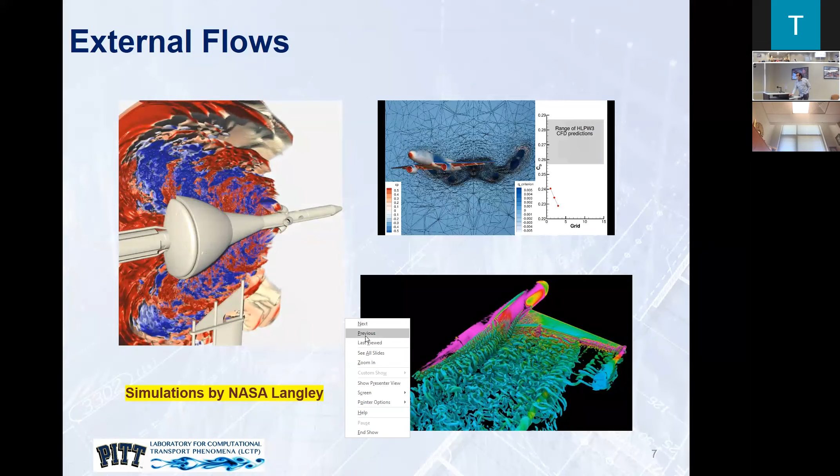Oops. Let's see if I can go back. This is right click and then go. Previous. Previous. Second. Yeah, just one. I have to. This is my. But I promise for the rest of it would not be as bad. Okay. One more.

But in my case, it just happened my last PhDs, the latest ones, just happened to go to data firms. They're getting 3 times as much salary as a professor or a research scientist. So a lot of the last set of my students are going to software companies and to data firms, the kind of things we do. They just seem to be more interested in doing computations, and if you're in data sciences and all that, it just happens to be going there.

Anyways, it's been a pleasure working with them, and I will be showing some of the work of these people. So you guys here at NC State...

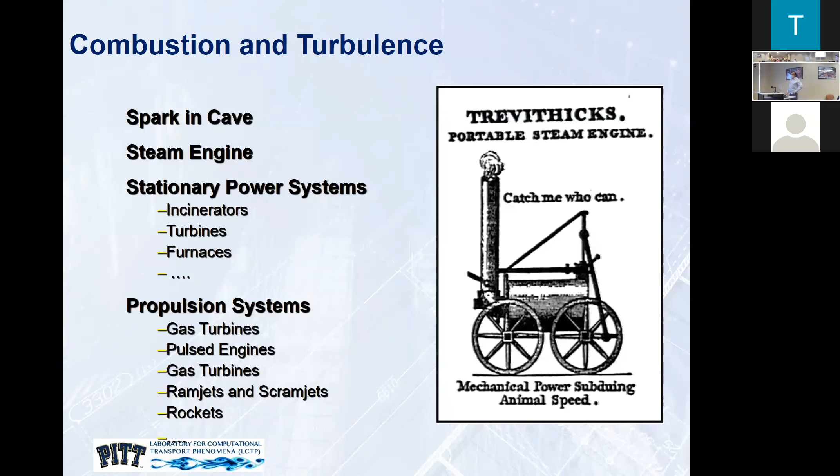I don't have to talk so much about it, but the importance of combustion and turbulence has been there since mankind has been there, a major part of aerodynamics and propulsion. And you have the world experts here in all of this field.

So as you know, if you're working in the field of aerodynamics and propulsion, the engine propulsion is one of the most important parts of the aircraft. That's the most important part of the aircraft to be concentrating on.

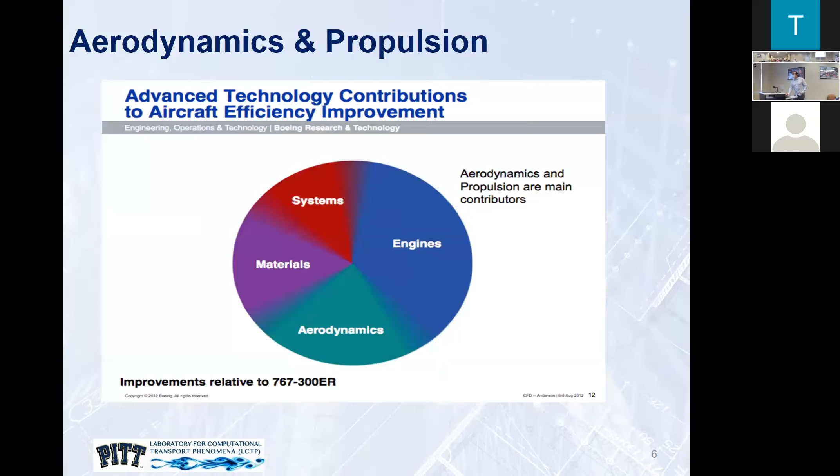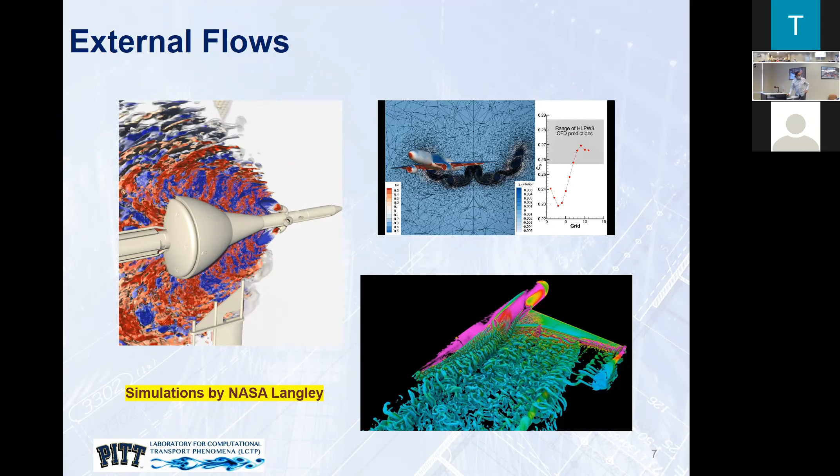And it goes for both external flows. Any of those your calculation? Because I stole them from NASA. So

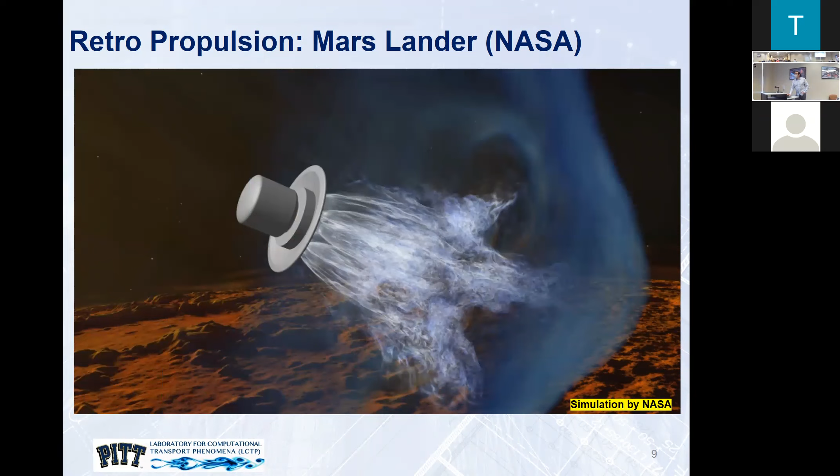And internal flows, that's where combustion is of primary importance, and also for the future, and all the other things that are outside of what we do on an everyday basis.

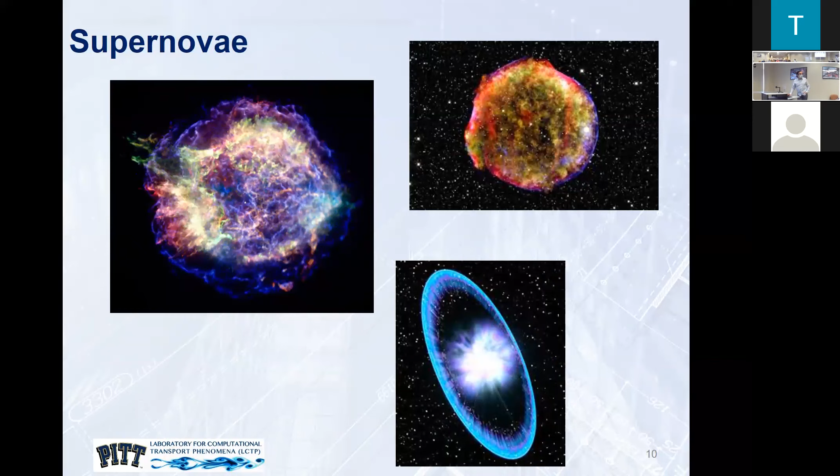If you want to do supernova, it just seems that DOE is very much interested in it. Combustion is a very important part of it, a major part of energy consumption, and even in the foreseeable future, combustion seems to be a major part of energy usage.

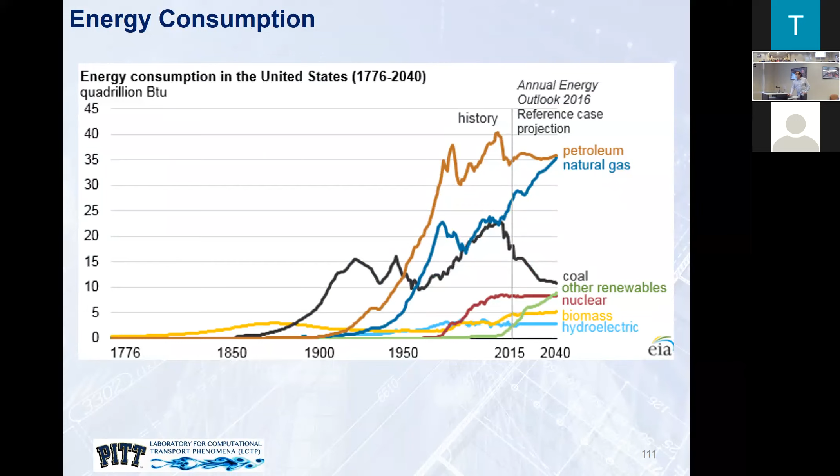Now this part you already know. But what has been happening within the past 5 to 10 years, there have been two major revolutions affecting the combustion field. One of them is the big data revolution, and the other one is the second quantum revolution.

Both of these revolutions have been major impact in other fields, and are starting to have some effect in the field of combustion as well. As you already know, the paradigm of science has always been theory and experimentation.

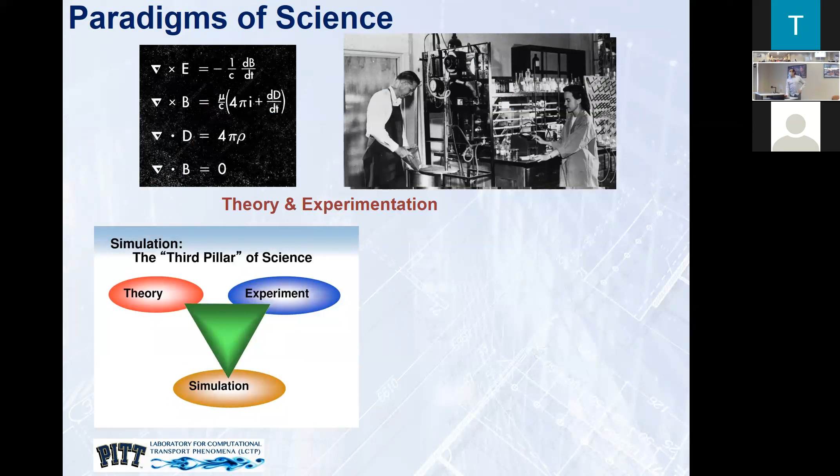Back in the 80s, people came up with the field of simulations, calling them the third pillar of science—in addition to theory and experimentation, you can simulate things with the use of computers.

And now the fourth paradigm is the emergence of data. If you have a model and you have data, that's why data sciences are becoming very important.

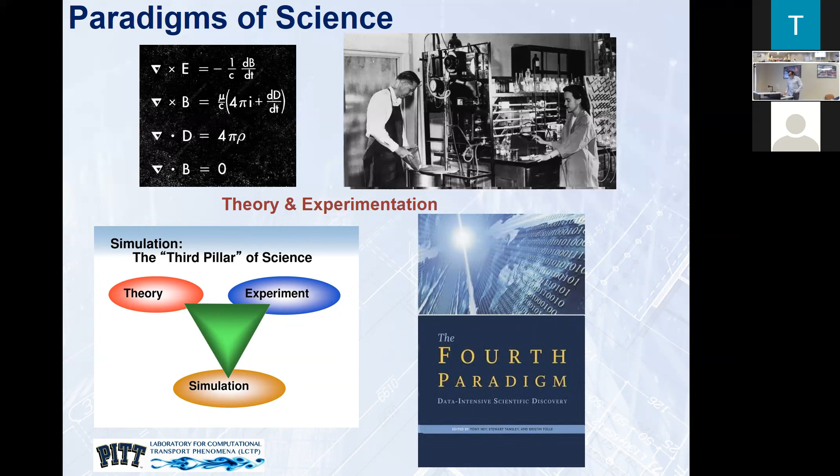So combustion scientists and turbulence people have been moving along with this. They've been going through the simulations, and one of the major advancements has been done by turbulence people, computational turbulence researchers who made major impact in the field of simulation. Now data is having similar effects.

Also with computing platforms, as you know, starting with card punches back in the 50s and 60s, and going on to parallel and massively parallel computations. But if you look at how computing has been going for the past many years, there's Moore's law, saying computers are supposed to upgrade every 18 months or so, doubling speed every 18 months.

Every year there's a competition over which school or country has bigger or better computers. What's happening is that as these chips get smaller and smaller, we've come to a point where the speedup in computation cannot keep up.

I've been doing turbulence computation for the past 40 years, so I've seen this incremental change of computers, doing faster and faster computation. But we're getting to the level where increasing the Reynolds number with the supercomputer isn't gaining much anymore.

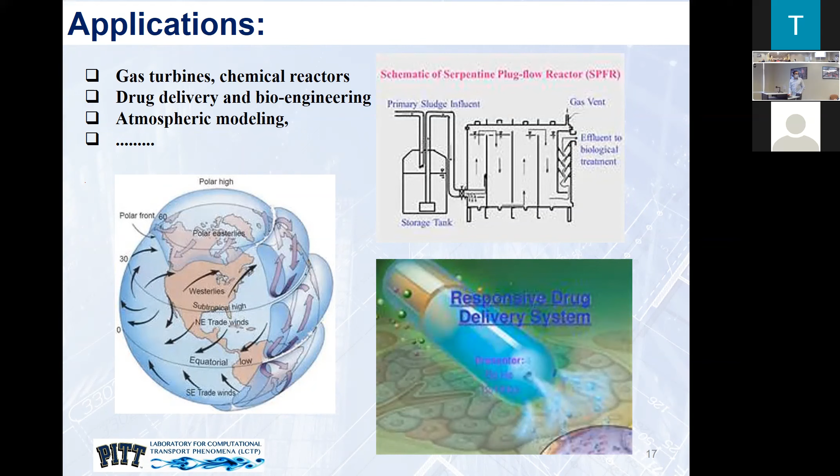This problem, binary mixing and reaction, has a lot of applications, as you already know, and many of you are doing this kind of calculation.

So there are two things that we do. If you're a graduate student in this department, you know what they are. We approach the problem of turbulence and combustion in two ways. One of them is the brute force direct numerical simulations. We simulate the heck out of everything. So we are limited by the Reynolds number and Damköhler number and all that.

On the other hand, we also do a lot of modeling of these flow problems, something that is known as the Reynolds-averaged Navier-Stokes and large eddy simulations. And we use stochastic models. We have very sophisticated stochastic models for modeling of those. You guys have had Dr. Hassan, who was one of the premier people in the field of RANS modeling.

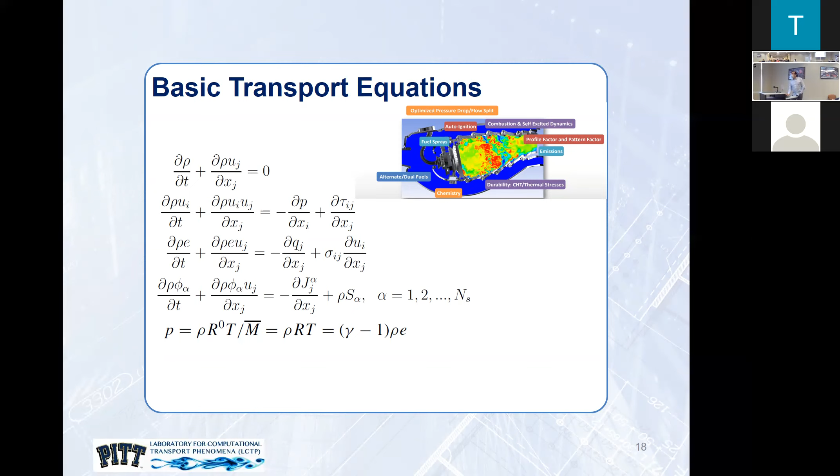He does Reynolds-averaged RANS modeling, Reynolds-averaged Navier-Stokes. We do something called the probability density function approach. It's something I have been doing for the past 30 plus years, and we have developed it for the context of LES. So we have a basic set of equations for chemically reacting systems, whatever way you want to write them.

And what we would do with these equations, we either filter them or we average them. By filtering, meaning that you want to look at the smoother field, so it is not as expensive. With LES, you pass it through a filter and make it smoother, and that filter is given by the filter function G. And this filter has to have some mathematical properties, so you can do things correctly.

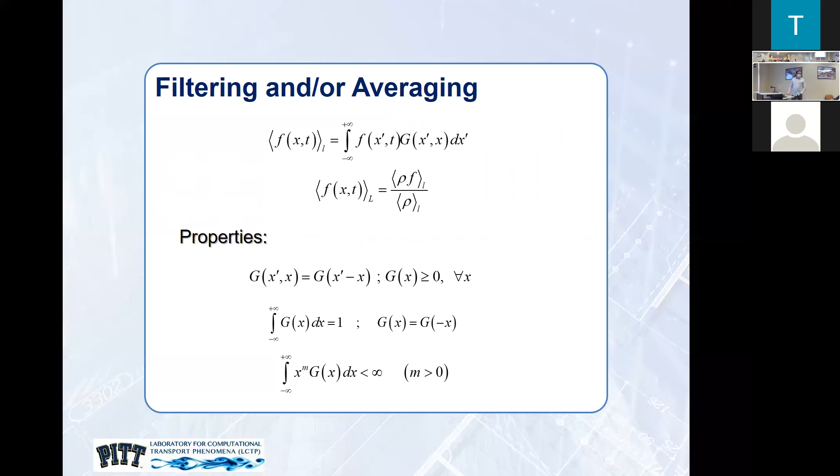So if you write the equations for the filtered quantities that are given by these brackets, either by subscript l or capital L, whether one of them is density weighted or not, you can write the transport equations for them. And if you write the equations for these averaged quantities, like anything else, you would find a whole bunch of terms that you need to model. If you take a course in turbulence, there's a whole bunch of these correlations for the energy equation, for the momentum equation, for the scalar, and S, the source term for the chemical reaction. Those are the terms that you need to model in order to close the set of equations.

And this is what you already all know. Okay. And for those second order moments, either subgrid or Reynolds averaged, if you write the transport equations for them, they have higher order terms that you still need to model. This is a problem turbulence modelers have been dealing with for a century. Since the time of Osborne Reynolds, people have been dealing with this problem.

Let's see. Okay, so the approach that we had adopted, and now we see the relationship with everything else we are doing with machine learning and quantum computing. We look at something called either the filtered density function, if it is used in the context of LES, or the probability density function, as it is known in the context of Reynolds-averaged Navier-Stokes. We look at the PDF, all of the statistical behavior of all the variables.

So for example, if you have chemically reacting flow at low and high speeds, your transport variables are all the velocities, pressure and the energy, and all of the species. So in here you have the velocity u, the phi, that is the scalars, and the density, pressure and the energy, and P is the PDF of them within the subgrid. And you can write an exact transport equation for that PDF, and that equation is written exactly like that.

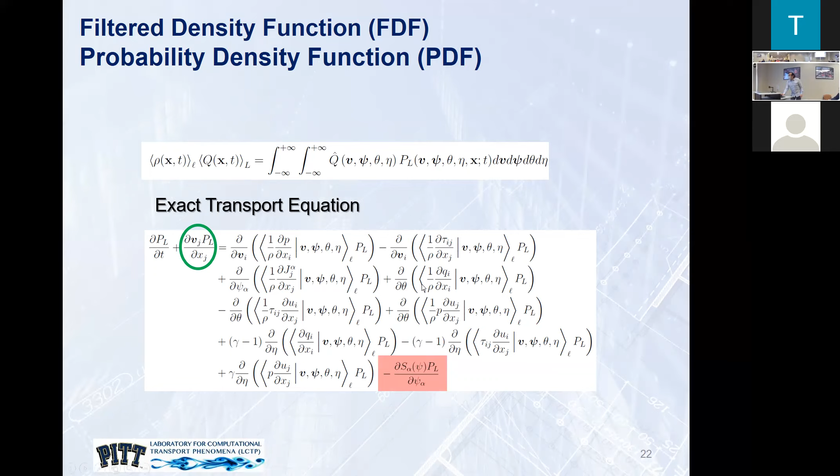The bad thing is all the other terms that you see in there, the conditional averages, you need to model. You need to model those terms. And for a long time, modeling of these terms has been one of the major problems for people who have used them.

We borrow from the field of stochastics. You write the stochastic differential equations to capture the physics to the best that you can. This is a model, and a model is never exact. So what we do, we look at all the statistical quantities, like velocities, concentrations, energy, and pressure, and we write a stochastic equation. Those are model vectors.

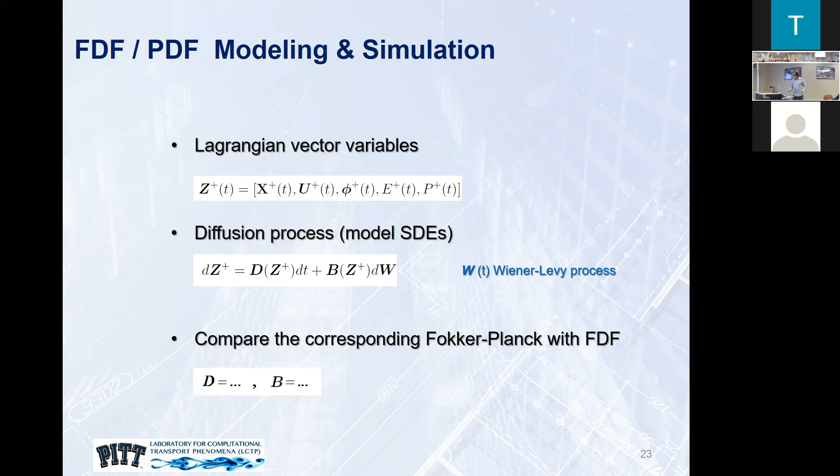And so that equation dz, the dt term is like an ODE, and then the W is the Wiener-Levy process, so it makes it a stochastic differential equation. And associated with that stochastic differential equation, we have a Fokker-Planck equation that basically tells you what your model PDF is. So that's the way we model this. And how we model them, there is a whole art to it.

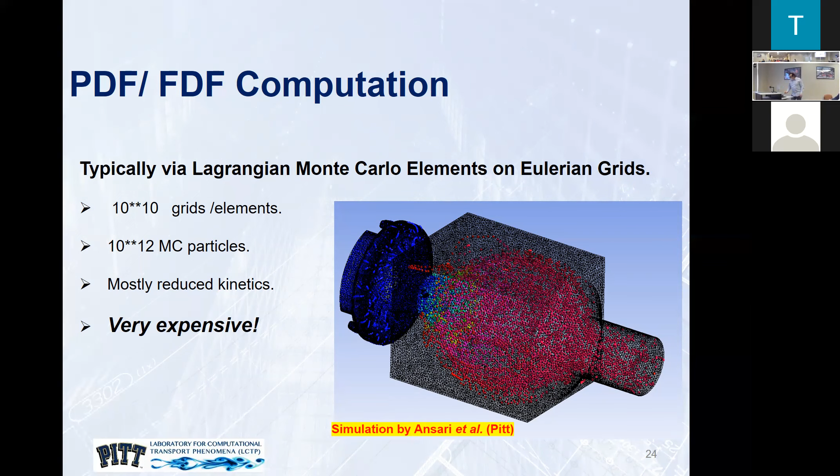So the idea is, how we can improve on this modeling, and how can we transport them on quantum computers, even though quantum computers do not exist yet. So the first part, which I'm going to talk about, is that we said, okay, let's do the modeling of this thing, but not for a big combustor. Let's see how we can use machine learning techniques. There's been a lot of talk about machine learning, but we said, how can we use machine learning techniques and augment them with the physical modeling?

In order to understand some of the terms inside this PDF or FDF closure that need to be modeled, we looked at a simple homogeneous mixing in which we have two reactants coming inside this reactor, and it is considered homogeneous turbulence. It goes along the reactor, and you get the product coming from the other end. And that is the exact equation for the PDF, in which we have that term, the conditional expected dissipation. That second term on the left-hand side needs to be modeled.

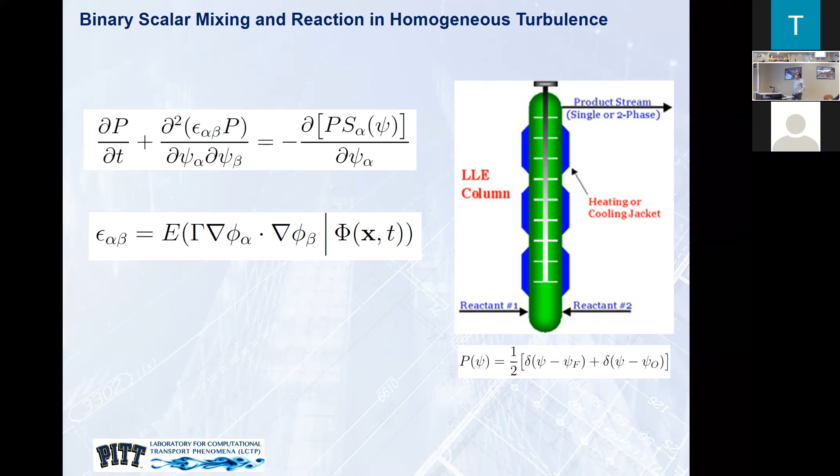So we said that if we do the calculations on it, this is the DNS, people do it all the time, we can get that conditional expected dissipation out of it. So it can come either from the DNS or from experiment, right? But for people who do these experiments, calculating the conditional expected dissipation is a very expensive thing. We said, okay, is there a way that we can use this model method in order to model that term? So we have been using physics-informed neural networks.

And I bet you guys, these days, anywhere you go, you see these neural networks everywhere, right? People see them all the time, and some people are even sick of it.

So what we have done with physics-informed networks is that we said, okay, if we get the PDF from experiment or from simulations, how we can use that data to backtrack, like reverse engineering, all the terms that need to go into it as a closure. And people who do DNS do this all the time. They want to capture closure from the simulation.

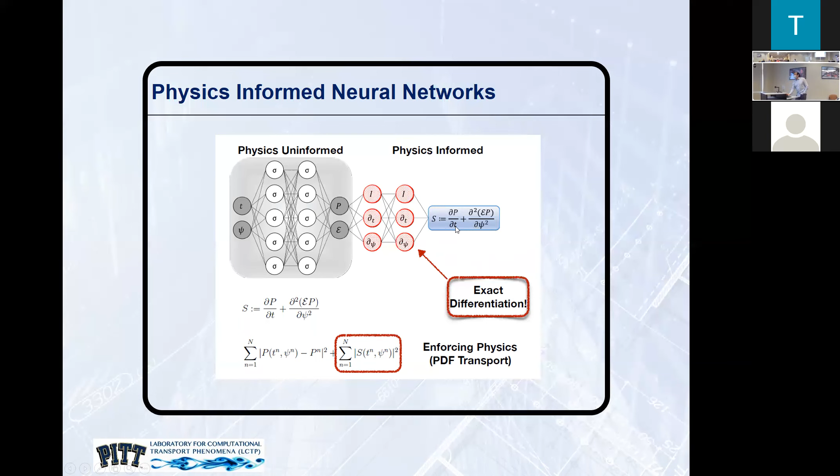So we said, okay, how does it work? The advantage we had is that if you have been working on this for a long time, you always have good cases that you can use for testing new models. Back in the 90s, one of the big names in turbulence modeling was Bob Kraichnan, who was the last postdoc that Albert Einstein had at Princeton. Bob Kraichnan came up with the amplitude mapping closure, which back then was supposed to be a revolutionary model of turbulent mixing.

So we did this with a very simple deep learning framework, about 10 hidden layers and about 50 neurons per layer. The PDF could come from anywhere, it could be experiment, but in this particular case we have an analytical solution. And what you get from the exact solution and machine learning with a very small number of neurons is incredible. The exact PDF that the machine learning technique sees, and the one that we learned, for both the PDF and the conditional dissipation, the agreement is very, very impressive.

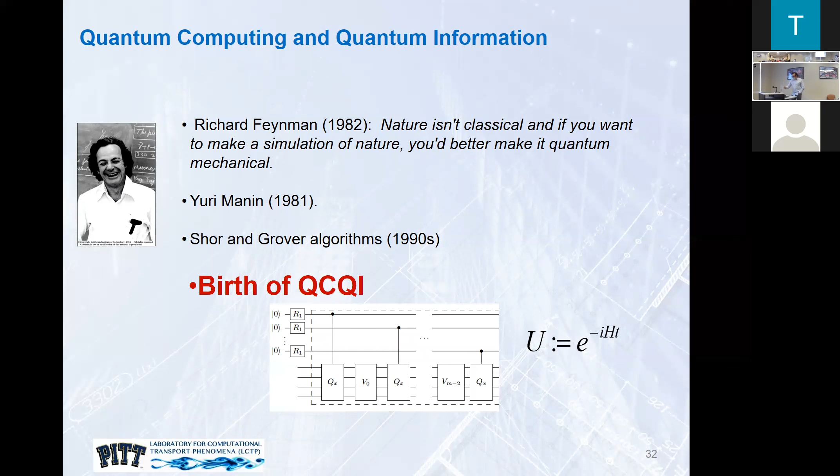So the first thing, the quantum algorithm by Shor, shows that if you want to factor large numbers, it is much, much faster on a quantum computer. So it has many, many applications. And the other one is the Grover algorithm for search. What you want to do with searches is much faster with quantum computation.

And this is what people have known since 1990. The idea is, okay, what can you do with it that can be useful for others? And that's where we came in. We're coming from the engineering side, and we say, okay, what can we do that can be useful from an engineering point of view? If you look at the difference between classical and quantum computing, on the classical side, you always have bits, zeros and ones. Either 1 or 0, right?

And in quantum computing, the concept of the qubit reminds me of myself. When I first came to this country as a foreign student, people asked me, would you like coffee or tea? I said yes. Foreign, coffee or tea, yes. So it is 1 or 0, yes, both at the same time. Both 1 and 0. That was the qubit.

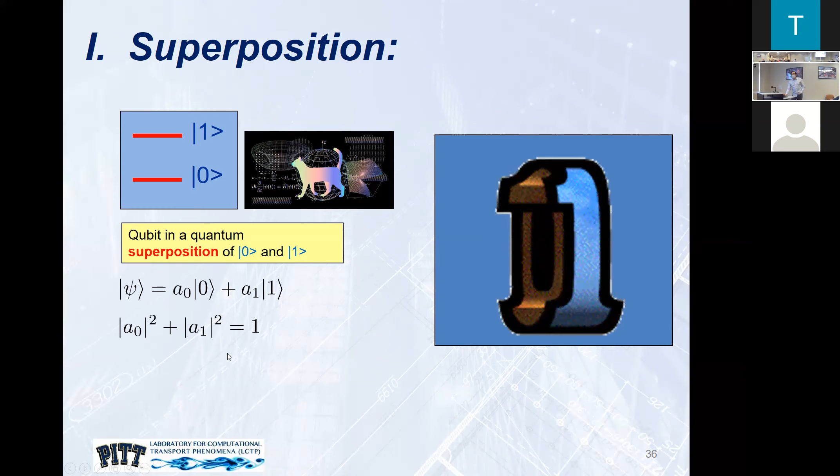So that's one. And how can it be 0 and 1 at the same time like this? This is 0 and 1 at the same time. But once you measure it, that becomes your reality, right? In fact, this would be the probability of being in state 0, the probability of being in state 1, and the summation is 1. But after you measure it, the probability of the one that you observe becomes 1. The basics of quantum.

And the second one is entanglement, okay? Entanglement is that if you have more than one qubit, the state can be described by 2 to the power of n complex numbers. So for example, with n qubits, any state could be represented with all 2 to the n of these. So with just 1,000 qubits, your state is represented by about 10 to the power of 300 coefficients.

And the physicists tell me that this is more than the number of atoms in the universe. I said, are you sure? I mean, that seems small. And they said, well, if you don't believe us, go count them. And this is the number of things that you can use.

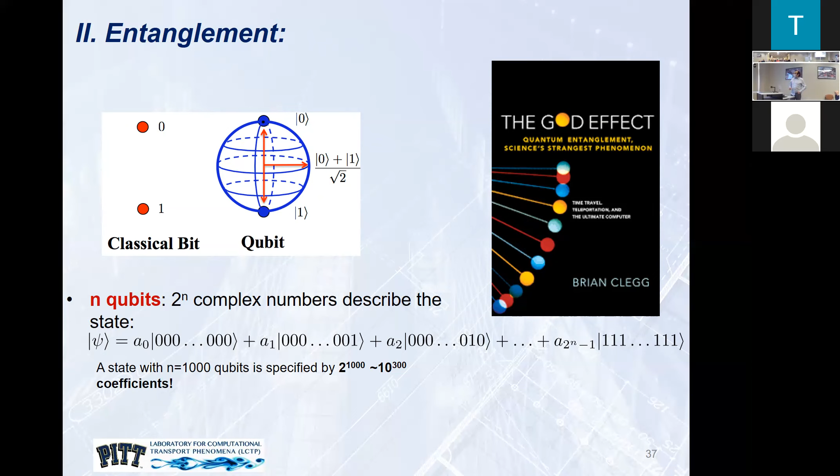And imagine if that is the storage of your computations. There is a whole bunch of books on it related to the supernatural and stuff like that. I try not to think like that because my connection with the afterlife is not so good, so I just look at them from an engineering standpoint.

So what is the difference between a classical and a quantum computer? The one on the left is just typical classical gates, zeros and ones, and you have all the NOTs and ANDs and XORs and all the other gates. The one on the right is a whole bunch of matrix operations. These are all quantum gates, and that's how the operation is done. So this is exactly what a quantum computer does: a quantum state coming in, a whole bunch of gate operations going on, and that's what the result would look like.

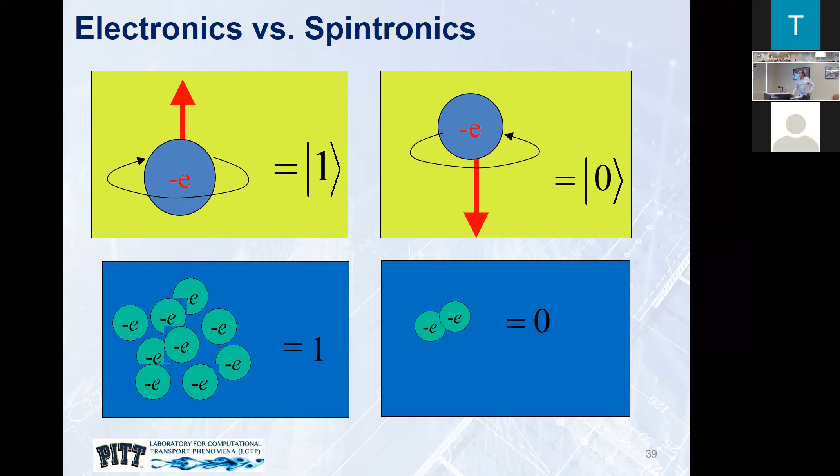And what you have seen in classical computers, you see electronics, zeros and ones. In quantum computing, the way they refer to them is spintronics, and you see a lot of this, an electron with a spin up and down that represents the vectors zero and one.

So how does the calculation go? In classical computing, you start from initial conditions and you do the calculations. At the end of the calculation, that's what the result is, exactly what it is. Even if you are doing a stochastic calculation, at the end, the results are deterministic. Even if you are doing Monte Carlo or stochastic, at the end, you have everything in hand, you print it, plot it, whatever you do, take selfies with it. The thing is right in your hand.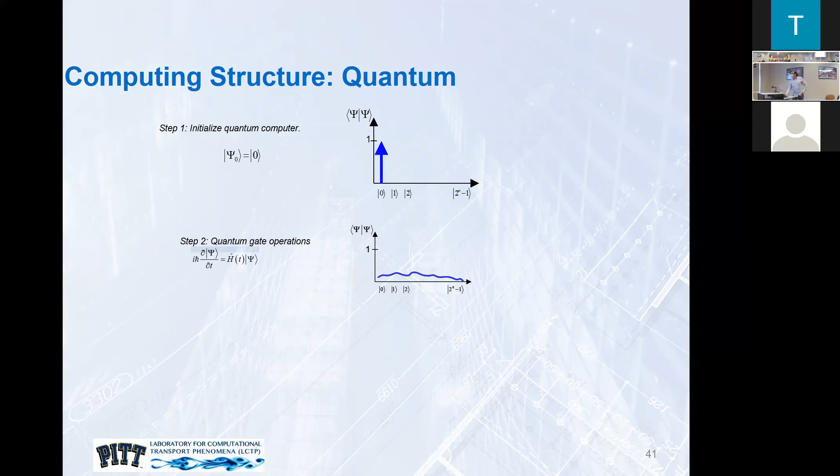Now, what is happening with quantum computing? You start from the initial case, then you have the initial state, and immediately, let's say, the gate operation is given by the Schrödinger equation. So immediately you get a stochastic PDF. All of the states are in it immediately. And so once you measure it at any point, that's exactly what your measurement is at that point.

That's what you're measuring. So the quantum algorithm is what gives that measurement with the most accuracy possible. That's all the beauty of the quantum algorithms. And they have to be written using entanglement to make the calculation more efficient than the classical one. That's the whole idea of quantum computation. I don't need to talk about this one.

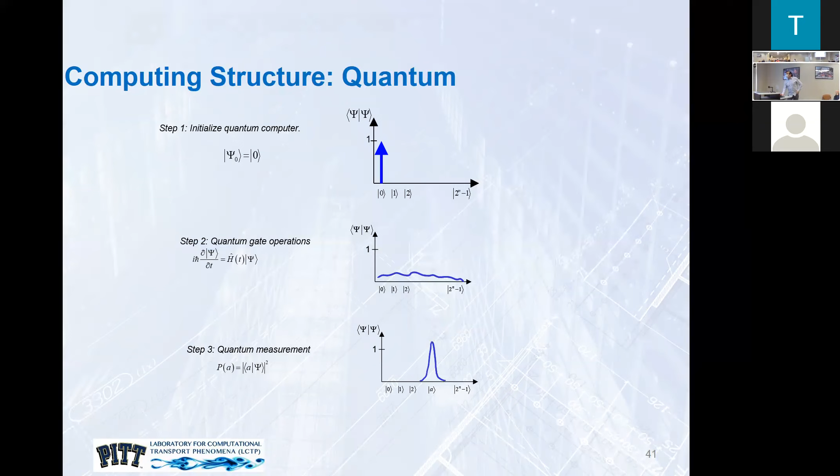So quantum algorithms, that's what we're interested in. There are people at IBM and Google talking about gate-based universal quantum computers, but they're not really operational, but the algorithms are there. And the speedup comes from this enormous Hilbert space because of superposition and entanglement. And there are algorithms being written, some of them even in mechanical engineering departments.

These algorithms are shown to be a lot more accurate. For example, search algorithms, solving linear algebraic equations, Monte Carlo sampling. These are for digital universal quantum computing. People have shown if these machines are there, they're going to be faster. These algorithms are faster than their classical counterparts.

So the way we made use of that for solving this problem: we solved the same mixing problem, but we modeled the mixing term, because we have to model it. We modeled it with the coalescence dispersion model and used Monte Carlo to solve it. And we solved it with Monte Carlo classically and with Monte Carlo by the quantum algorithm. Rolando Somma is a research scientist at Los Alamos. He's a quantum algorithm expert, and we worked with him in devising this algorithm.

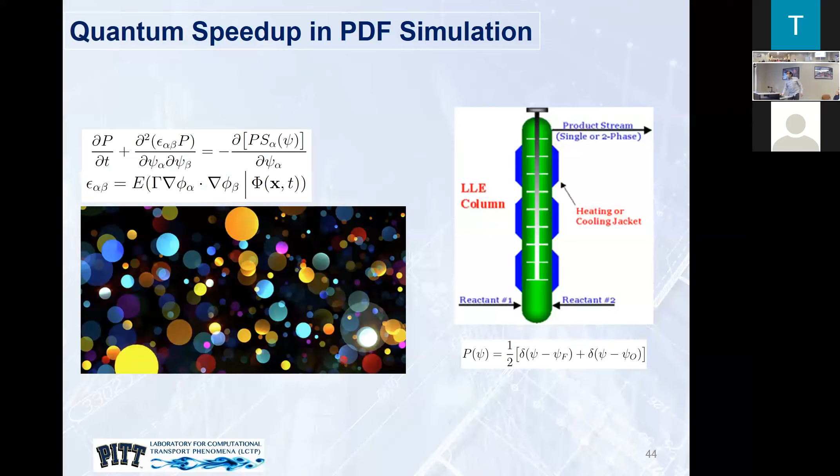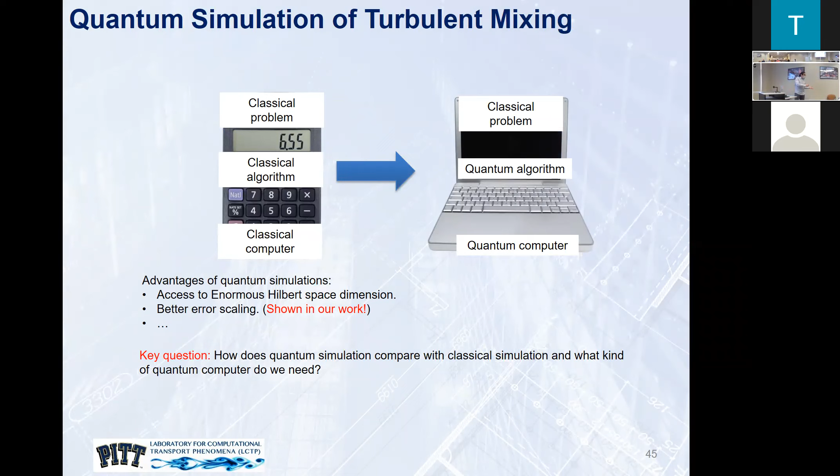And the way these calculations are being done: normally you have a classical problem, a classical algorithm, and a classical computer. But here we have a classical problem and the quantum algorithm, but we don't have a quantum computer. So we had to mimic this on a classical computer using the quantum algorithm, which is very inefficient. It's not an efficient way of doing it. But we wanted to demonstrate what happens if the machine was there.

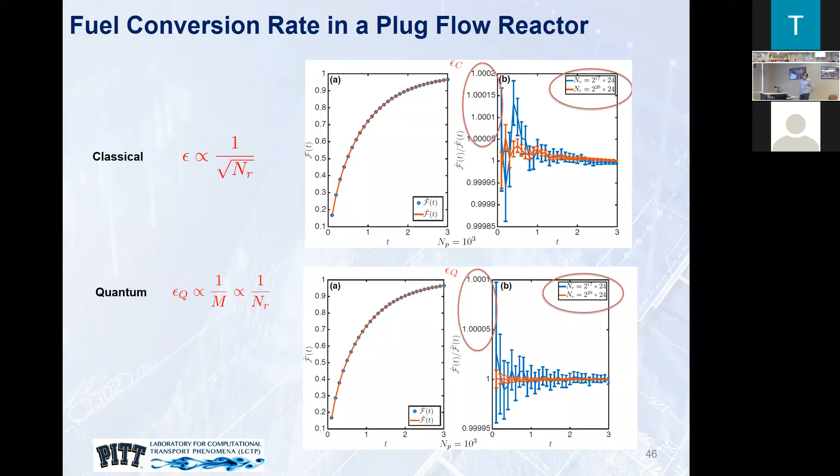So this is what we basically get. This is the fuel conversion rate in a plug flow reactor. The one on the top is classical computing. The error of classical computing goes as 1 over the square root of the number of realizations in a Monte Carlo routine. And the one on the bottom is the quantum, which scales as 1 over n. And these calculations are being done with a large number of particles.

So this is what we find to be a major breakthrough in this business, showing the error scaling if you are doing it classically or by quantum. The quantum, being the red one, gets a much, much faster rate for this kind of calculation. So if you're a combustion scientist, this is one of the examples in which quantum computation could be much more productive, much faster and economical.

But one example, we showed there are other examples that people are showing. There are some people using algorithms to solve turbulent pipe flow problems and others.

Now there's a problem with digital quantum computations. One of the major problems is that the qubits interact with whatever goes outside. That's the nature of quantum things—they cannot isolate this. There's a lot of noise within the system, and this is one of the major problems people are trying to deal with. With this quantum gate-based universal computer, any kind of fluctuation—temperature, electromagnetic, whatever—this fluctuation would introduce error, and then how to make error corrections.

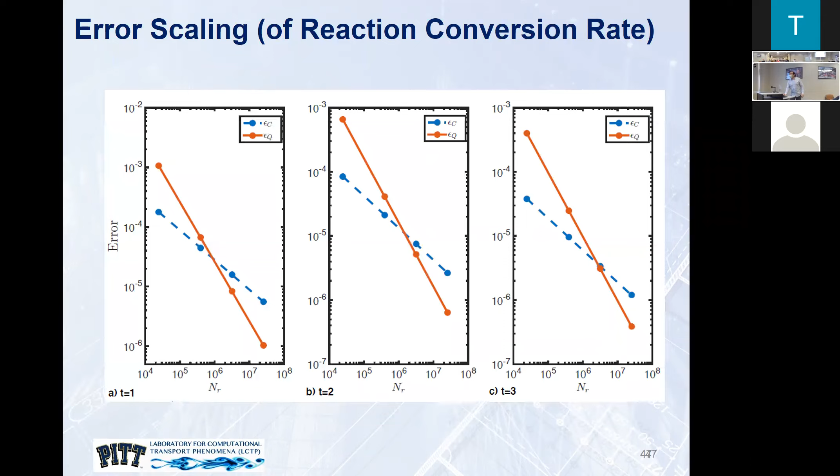So what are the options? What are the alternatives? I talked about some of them. One is the NISQ computer—people say okay, there might be some noise in it, but maybe the noise can be tolerated. That's one.

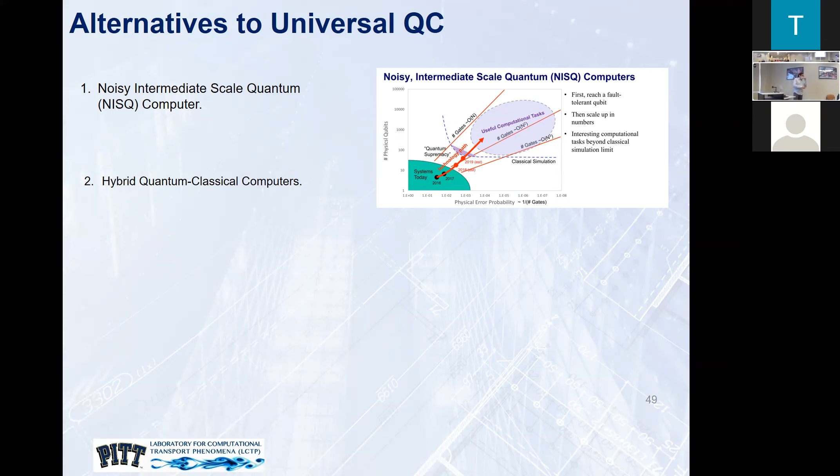There's another one, a hybrid quantum-classical computer. These are machines where we can do some part of it classically and some part in a quantum fashion. A lot of people in chemistry like that—they can do some calculations on the quantum side and then bring them back. That's one of the approaches.

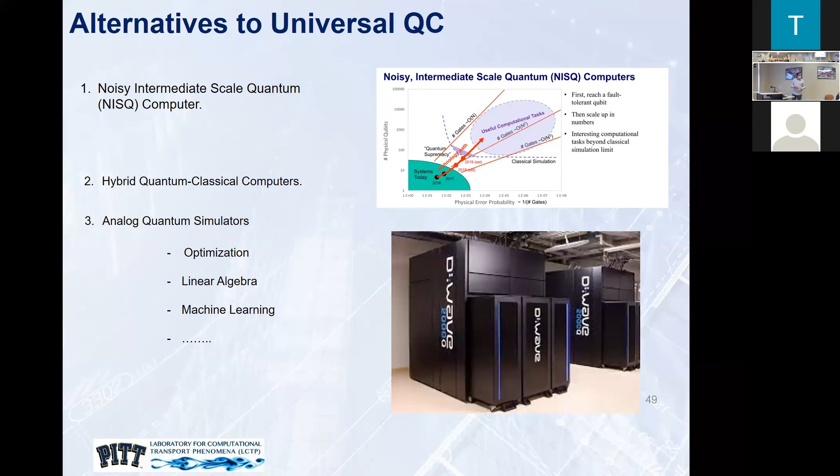And there's an analog quantum computer—you've probably heard of the D-Wave machine, the quantum simulators. What they do is just simulate a quantum system, a particular case where you know the Hamiltonian of it, and you simulate. So these are the approaches that are there. If you're interested, as I said in my review, I explain them and give references if you want to know more.

But the one that we like, and I really think is going to make a big impact, is quantum-inspired algorithms. These are algorithms that come from the field of quantum, but we apply them in the classical sense—the original idea comes from quantum. If we look at the Schrödinger equation, one of the things it has to do with is the many-body problem.

There are many bodies interacting with each other, and a lot of these interactions—if there's a lot of local interaction it might be important, but faraway interaction may not be that important. That's the way it is with turbulence: we have a lot of interactions closer together, edges closer to each other interact, while edges far apart would dissipate and may not have that much correlation. So we can see there's a big way that we can connect these two.

This is the idea in quantum physics known as tensor networking. Tensor networking is going to become a big thing. Our paper on this just appeared in Nature last month, Nature Computational Science, and I've been telling people this is going to be the new thing.

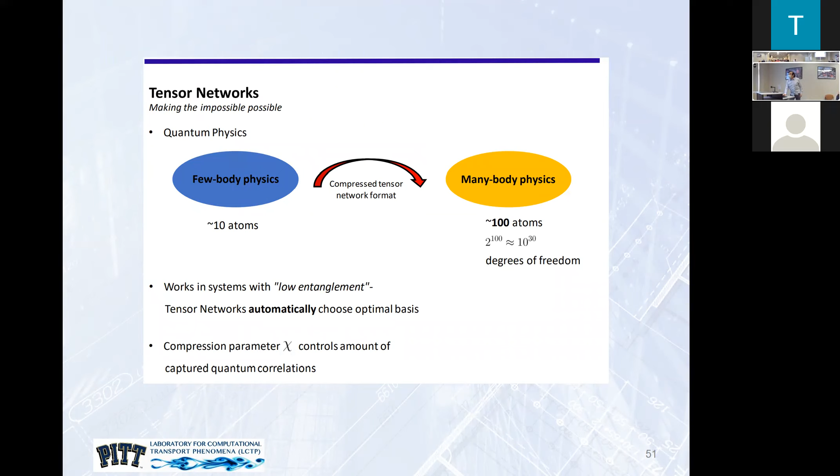So what we want to do with this tensor networking is something like this: in CFD, when we have a large number of grid points, what a lot of people have been doing, including myself, when we do LES and everything, is scale resolving—we say we don't want to worry so much about the scale, but rather how much of the Hilbert space do you need to do your calculations.

So, if this is the state variable, could it be—and it could be many. So representing all of these as a tensor, as an nth-order tensor, representing this thing as an nth-order tensor, I can always make it as a tensor product of two smaller Hilbert spaces, right?

If I have a big Hilbert space, I can make it composed of two different Hilbert spaces, and each one of them could become smaller and smaller.

This thing right here, in quantum terms, is a Schmidt decomposition, which has a lot of similarities to SVD, singular value decomposition, that you guys do in machine learning. So I can truncate this instead of writing them all out, and then these are the energies associated with each one of those scales.

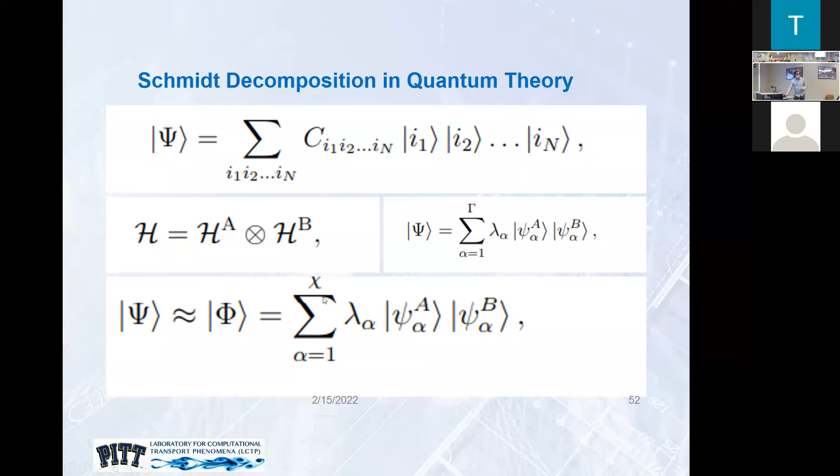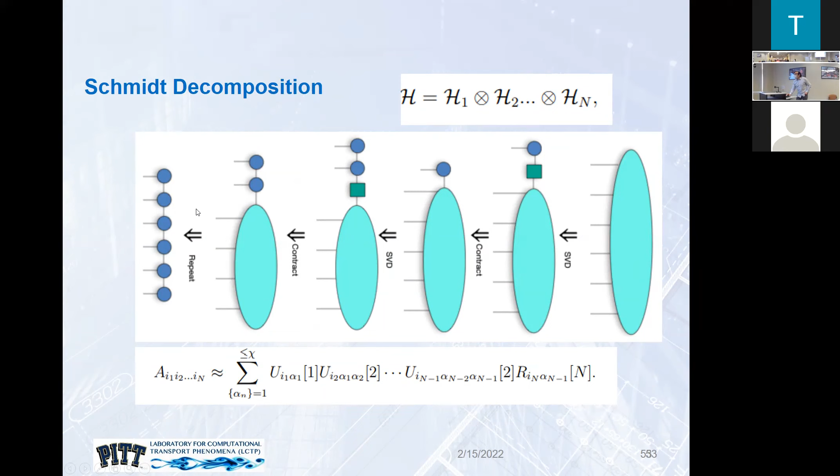So if this is my original field, I can systematically do SVD, contract, and finally make this original big tensor into the tensor product of a whole bunch of smaller ones, and do the operation on that. So let me show how this works.

Now, this picture is really nice. This is the Schmidt decomposition that shows the interaction between all of the scales. So these are all the energies. This is just one component of the velocity. And this is what the DNS requires.

The DNS requires this, but this shows that 99% of the energy is at the bounds that are needed. So you don't need this whole bunch of the other ones. You have this huge space for DNS, but only a small part of it is needed for your calculation.

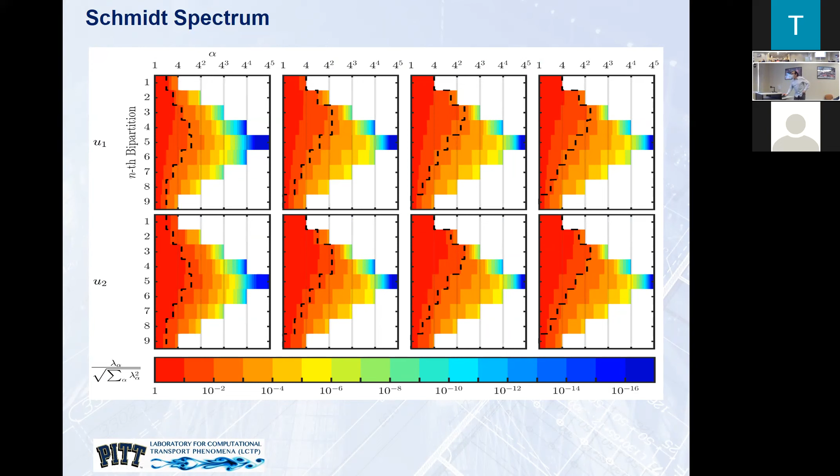I think this approach is new, the first application to fluid dynamics, and it's going to make an impact as we move along. So that's what the quantum-inspired approach is about.

They're saying that if you're doing tensor networking, it's much easier to actually program a universal computer. This is something I just believe because they say so. They have a paper on it, but to be honest, I cannot understand it. It's a very tough paper for me to read.

So what is the status of quantum computing? As you know, Google, IBM, and Microsoft are all building these computers. With 10 to 15 qubits, they're not very operational yet. People use them and say that with 50 qubits you can get quantum supremacy. Some companies say they've already achieved it, other companies say they haven't.

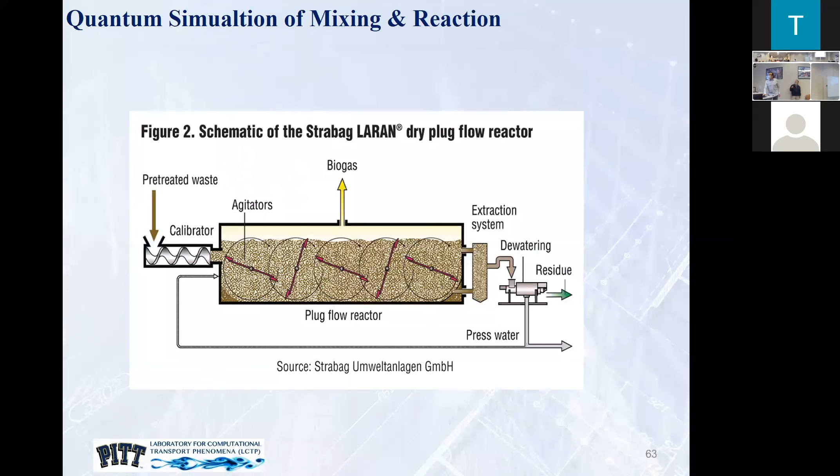I had one question on that last thing you were doing with tensor networks. It looked to me like you basically have a better subgrid scale model in some sense coming out of this. Is that correct? If you go back a couple of slides, maybe I can't remember the term you used, but you showed a comparison for that flow in a box.

Anyway, the tensor network thing you used, you had a coarse grid DNS, and it wasn't too good. Your model, or your approach, looked very much like the DNS itself, but at a coarser resolution. So in some sense, you basically built a subgrid model that accounted for all that stuff in a better way. Is that a way to interpret it?

We did that. What we did is we said, okay, this is the initial field. This initial field will represent them. So say that you have 120 grid points, we consider that a tensor of rank 120. We decompose that into a whole bunch of tensors that are order 2. But you had to have the initial field present.

What I'm wondering is, instead of having the DNS more or less drive the whole process, could you figure out how to make it work better on the coarse grid based on knowing what you did?

This one essentially is not about the grid, it's about the coarser structure. So this is the whole thing. I got it. So we don't do it on a coarser grid, but we are doing it on the coarser structure.

This whole idea people are talking about is that we've been doing modeling at the subgrid scale, but we should forget about the subgrid and focus on the structures. If you resolve the structures, and the structures are given by the interactions of all these tensors with respect to each other, then if you can model that, you are capturing the physics correctly. This is just a new way to show insight into what that should be.